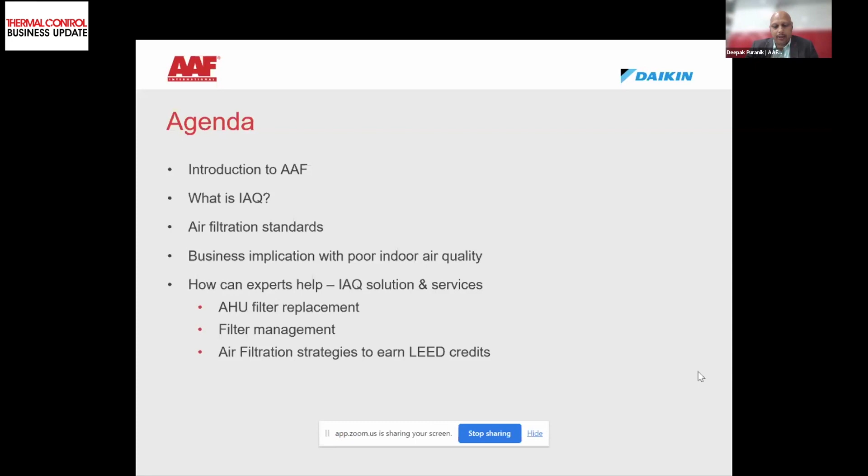The agenda of this quick talk of 10 minutes is to understand what is indoor air quality, what are the air filtration standards, what are the possible business implications of poor indoor air quality, what are the challenges, and then how an expert can help in attaining good indoor air quality in any commercial space.

So let's understand what is indoor air quality. Generally, indoor air quality is viewed and perceived differently by different individuals based on what they see, what they smell, what they feel. But it's important to have the technical view towards indoor air quality.

Indoor air quality refers to the air quality within the building, contributed by parameters like the level of pollutants present in that indoor air. It's often seen that if indoor space is not maintained the way it needs to be, then indoor spaces are 5 times more polluted than outdoor spaces.

What are those possible indoor air pollutants? They could be particulate matters, dust, ash, molds, pollen, bacteria, virus, etc. Then there's another type of pollutants: gaseous pollutants, which include volatile organic compounds, ozone, hydrogen sulfide, NOx, SOx, ammonia, such pollutants.

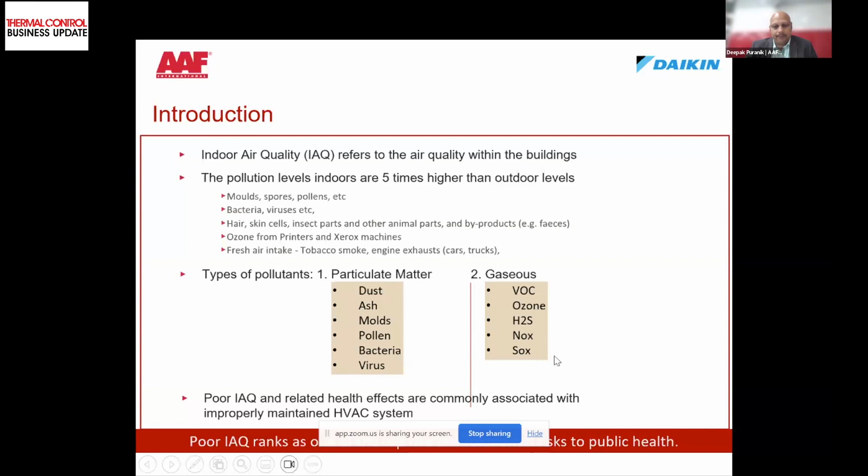Having understood what those pollutants are and what indoor air quality is, to define indoor air quality, standard organizations like WHO, OSHA, and a few more have defined what should be the threshold levels of those parameters we consider as pollutants. These are a few examples of the parameters that are measured and monitored to maintain good indoor air quality within occupied spaces.

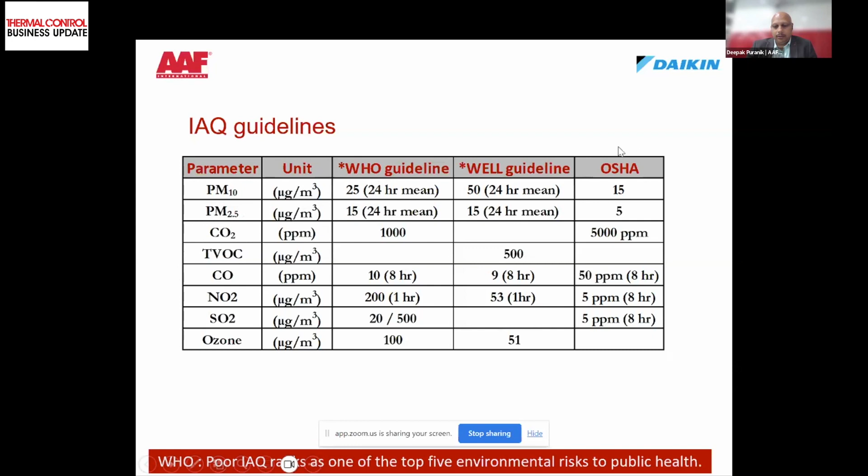The numbers and units that you see are the threshold levels guided by the respective standard organizations.

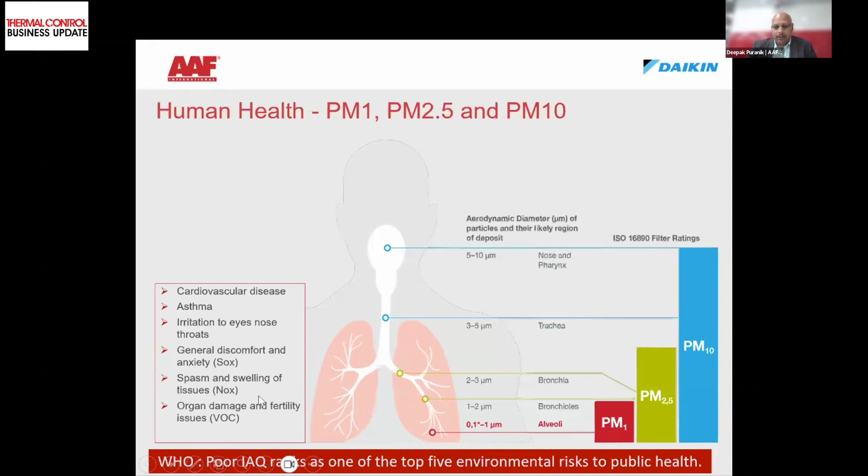Having understood what indoor air quality is, what different parameters contribute to it, and what should be the threshold levels, it's really important to note that this is often an ignored topic. One, because it's not visible. Second, because people often don't see the business implication of poor indoor air quality.

The reason I'm talking about business implications is because we all go to business establishments to work, and we spend most of our time in those indoor spaces. So it's very important to make business heads, CEOs, or business owners realize how important indoor air quality is, and what are the possible implications of poor indoor air quality.

Because of poor indoor air quality, many problems may arise in the occupants' area. It could be health issues, sick building syndrome, odor, energy consequences, equipment corrosion because of the corrosive environment, challenges of meeting environmental norms, and of course, you have neighbors to take care of. The implications of these problems could be many and on a large scale.

The immediate implication is poor employee experience, which results in low employee productivity, and that eventually results in financial losses. What is this value, what is this impact? It depends on building to building, business to business. It's important to make people realize how poor indoor air quality impacts their businesses, so that there is an inclination to invest in good indoor air quality.

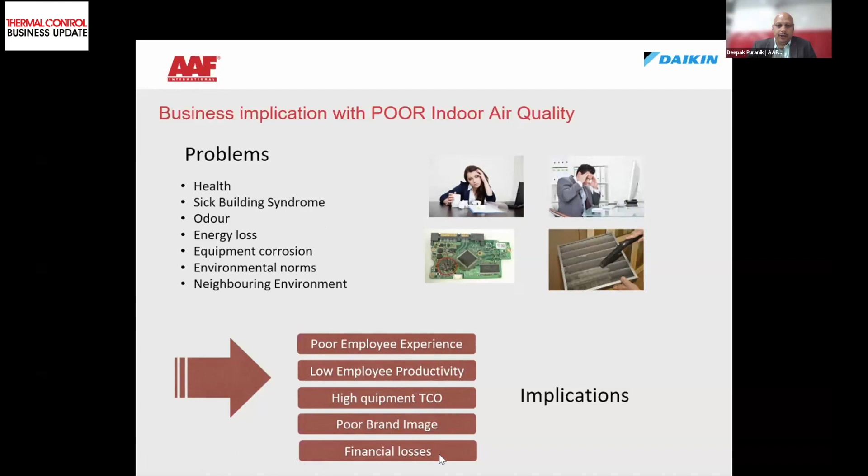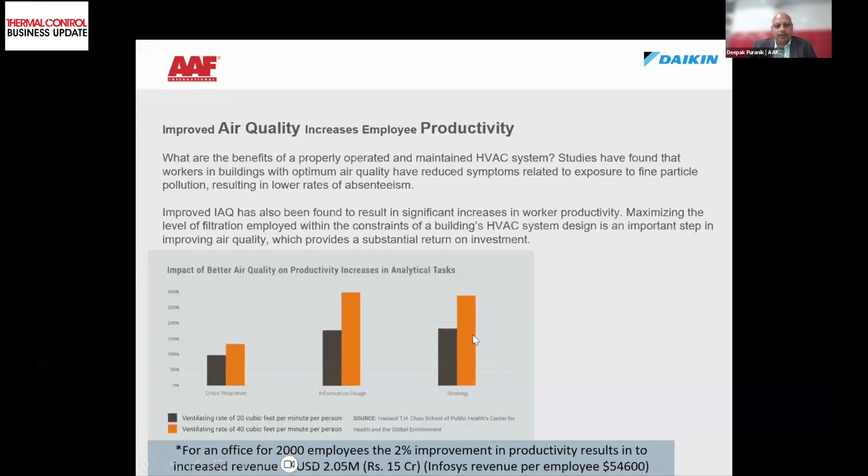Having understood what indoor air quality is and how it impacts business, what are the problems and implications, let's understand something basic: the technical side of indoor air quality, that is the air filtration standards.

There are three prevalent air filtration standards that exist. One is ASHRAE 52.2, the American standard. Then EN 779, the European standard. And then there's the ISO standard, ISO 16890.

The most recent standard introduced is ISO 16890, with the intention that ASHRAE 52.2 and EN 779 would be discontinued, but that hasn't happened in the practical world. People still talk about ASHRAE, EN, and also ISO 16890.

These standards have basically been derived based on the efficiency those filters exhibit when they are tested. I'll just take two examples of how these are categorized.

For example, if we look at a MERV 8 filter in ASHRAE 52.2, this filter exhibits 70% efficiency for dust particles of size 3 to 10 micron, and 20% efficiency for dust particles of size 1 to 3 micron.

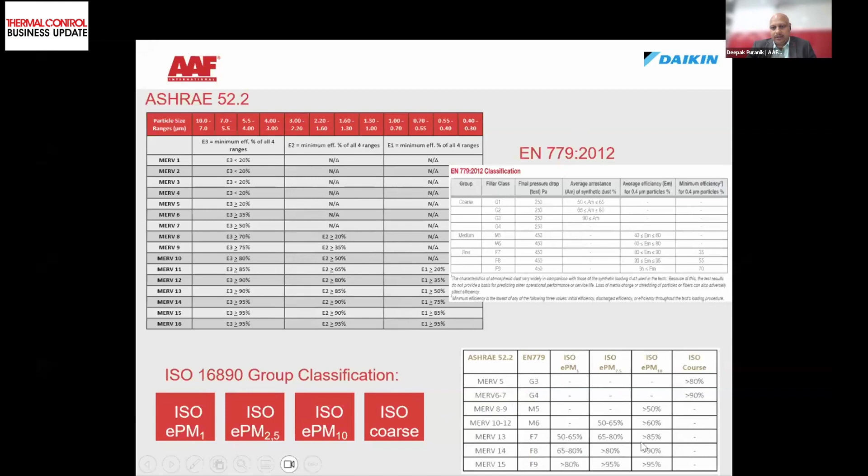I'll take two examples. MERV 8 is equivalent to G4 in EN 779, which is equivalent to 90% efficiency ISO coarse. And MERV 13 is equivalent to F7, which is equivalent to any of these three ISO standards.

In one of the previous discussions, I was talking about the scientific methodology to select the right filter, and this is the methodology. I will not go into detail, but I'll just touch on the surface.

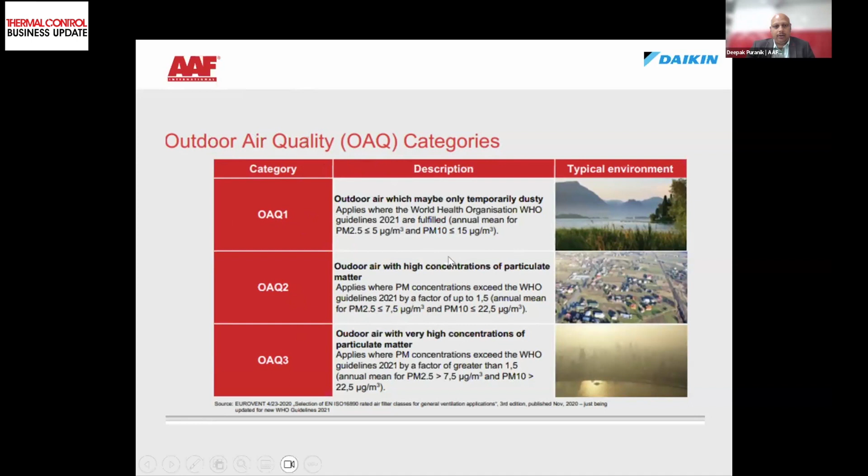When selecting the filter, it's important to understand the outdoor air quality. Outdoor air quality is categorized under OAQ 1, 2, and 3 based on the WHO standard. OAQ 1 is the cleanest environment, OAQ 2 is moderately polluted, and OAQ 3 is heavily polluted.

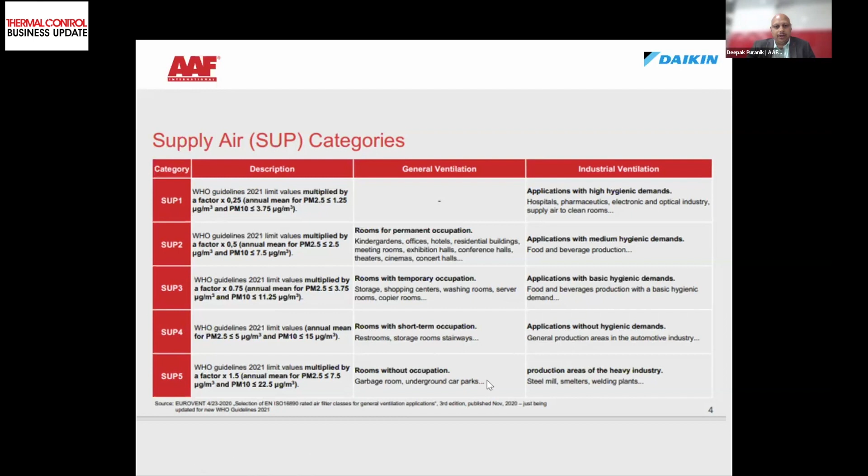Then it's important to see the supply air categories, classified under the range supply air 1, 2, 3, 4, and 5. 1 is the highest hygiene requirement for supply air, and 5 is the lowest. The supply air quality and outdoor air quality are mapped in a matrix.

For example, if you are coming up with a shopping mall in city center Delhi, how do you select the filter? We know city center in Delhi is classified under OAQ 3, and shopping malls are classified under SUP 3. So we would look at this matrix and map OAQ 3 and SUP 3.

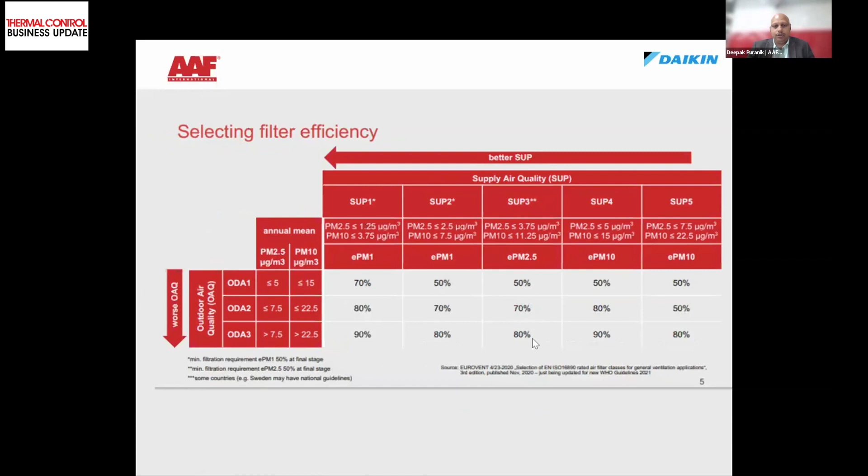So we arrive at an 80% EPM 2.5 filter. This should be the final stage filter, and to protect this filter, there have to be pre and fine filters that need to be worked upon. This is the simple and basic methodology to select the right filter for the building.

Having selected the performance efficient filter, it's also important to look at the energy that is consumed by the filter. So for all designers and those looking at replacing or upgrading filters in their building, it's important to know what kind of energy filters consume.

How does this reflect into the money that you spend? Typically, a 1 lakh square feet building would consume around 29 to 30 lakhs when it comes to filtration.

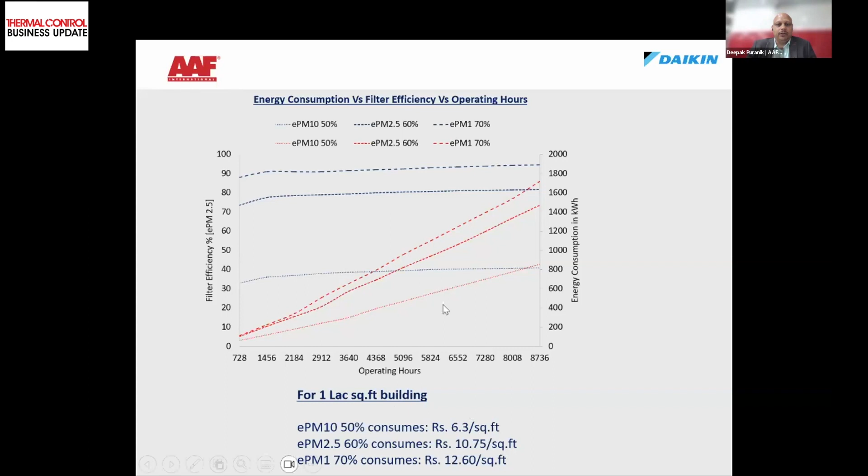So it's very important whether the right selection of filter could increase this number from 30 lakhs to 40 lakhs, or reduce it from 30 lakhs to 25 or 20 lakhs. Selection of filter, keeping energy consumption in mind, is very important.

This is one option for how you balance between the efficiency of the filters and energy consumption of the filter. I'll just read the inference of this research and study that has been done.

It says with 14% higher expenses in operation cost and capital cost of the filter, you will be protecting people from 82% of the potent contagious particles every day. This is a very important aspect for designers to consider.

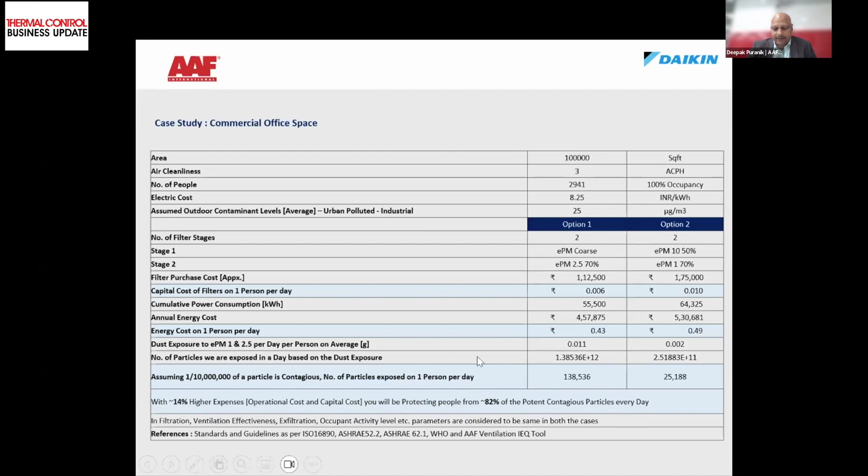These are the few flagship products used in the market, the AAF products. This is typically viewed as a pre-filter, G4 grade, equivalent to MERV rating equivalent to 60%.

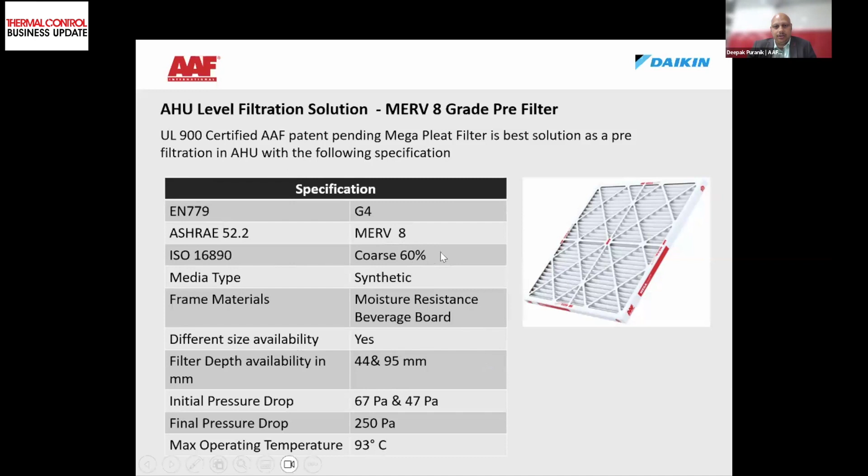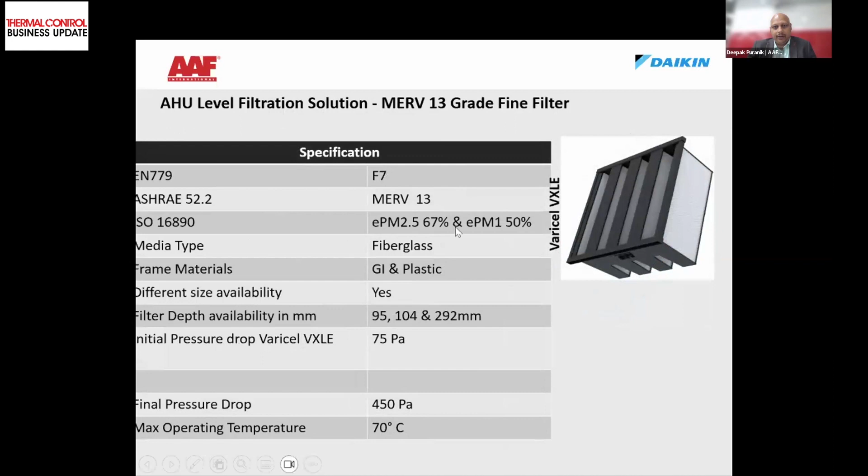This is the V-Bank filter. F7 grade, MERV 13, ePM2.5 67% and ePM1 50% filter. F9, MERV 15, equivalent to ePM1 85% filter.

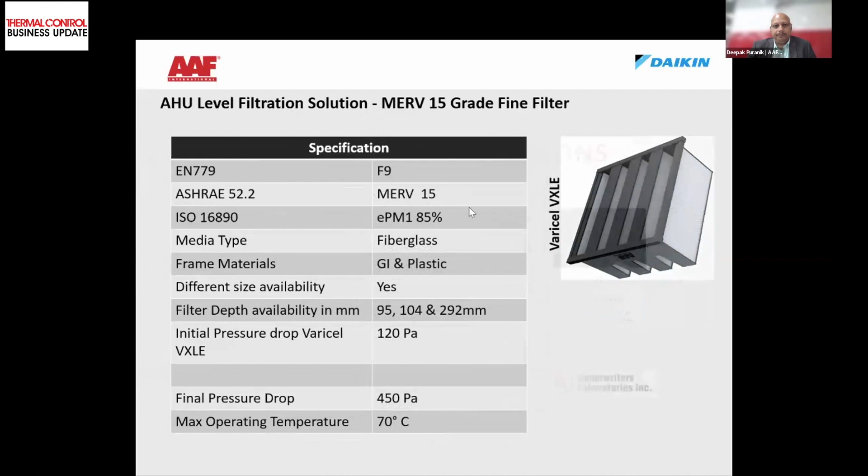Earlier in this presentation, we spoke about the gaseous contaminants. The mechanical filters do not filter the gaseous contaminants.

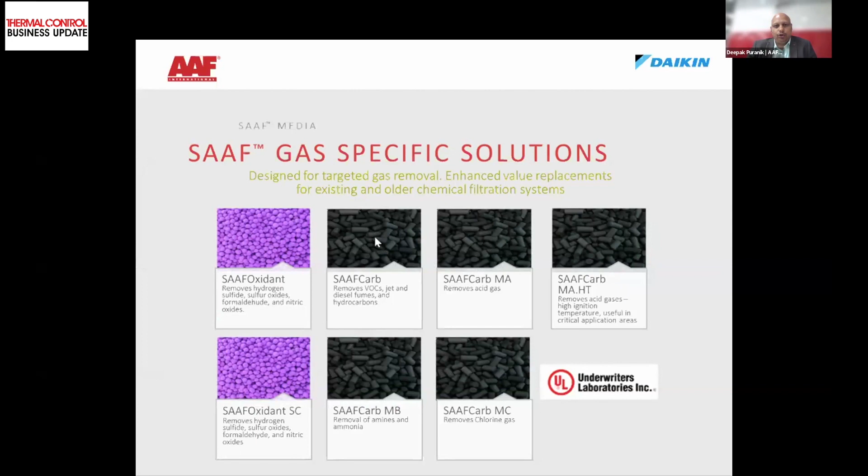So to remove the gaseous contaminants, there's something called gas phase filters, often known as activated carbon and activated alumina. Based on the contamination, these come in the form of granules, chemically coated based on the kind of gaseous contaminants that need to be removed, and used in the various equipment seen on the slide based on the concentration that needs to be removed. The type of equipment will be used accordingly.

So, knowing what kind of pollution, what threshold needs to be maintained, what guidelines need to be followed - how can indoor air quality experts help? That's something interesting to look at.

This also connects to the best practices question that Mr. Gopal Krishna asked earlier in this session. The best practices can start with having awareness programs for organizations and individuals, and then there can be site surveys and reports which include the benchmark and other analysis connecting to energy and total cost of ownership, etc. And then comes the solution.

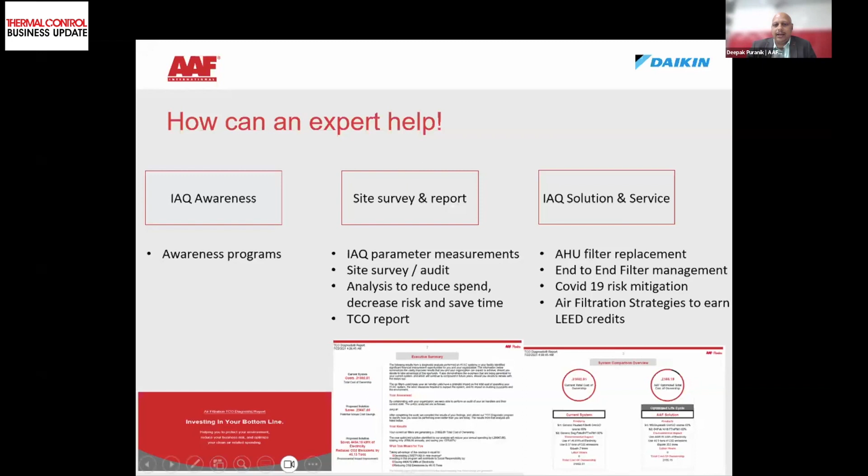Then what kind of solution can be had to serve the purpose and the reason why you want to go for indoor air quality. It can be for health reasons, for process, or for environment reasons.

This is one of the new trends people are looking for - IAQ service, which includes the end-to-end management of indoor air quality, where the expert would completely manage the indoor air quality, bring clarity into it, make the invisible visible. There would be 24/7 indoor air quality monitoring facility provided, and there will be commitment to indoor air quality. So it's more of a performance-based contract for indoor air quality.

With this, it would be a kind of OPEX-based model charged per square feet per month, and the days and months when the committed parameters of indoor air quality are not managed, that day and month will not be charged. Very interesting model to explore.

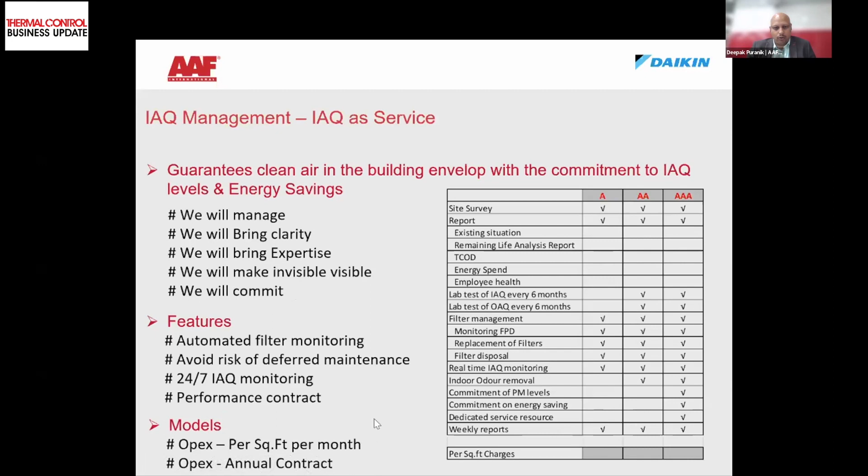This is the technology to monitor indoor air quality. There will be sensors - indoor air quality sensor, outdoor air quality sensors, DP sensors - connected to the gateway and to the cloud, and then from the cloud you can download an app where you'd see various parameters that help you have insights of indoor air quality, energy usage by the filters, remaining life span of the filters, and the TCO of the equipment invested for achieving indoor air quality.

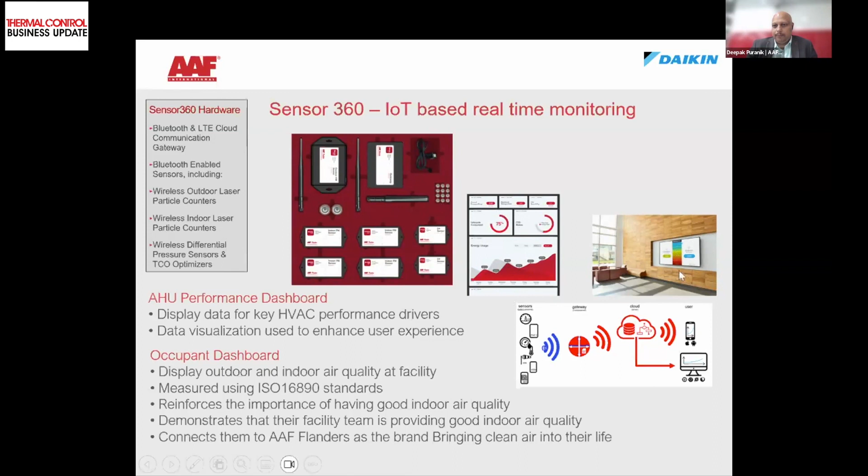All this can be viewed, and you can also display the indoor air quality parameters and outdoor air quality parameters on the smart TV. So such provisions are also available.

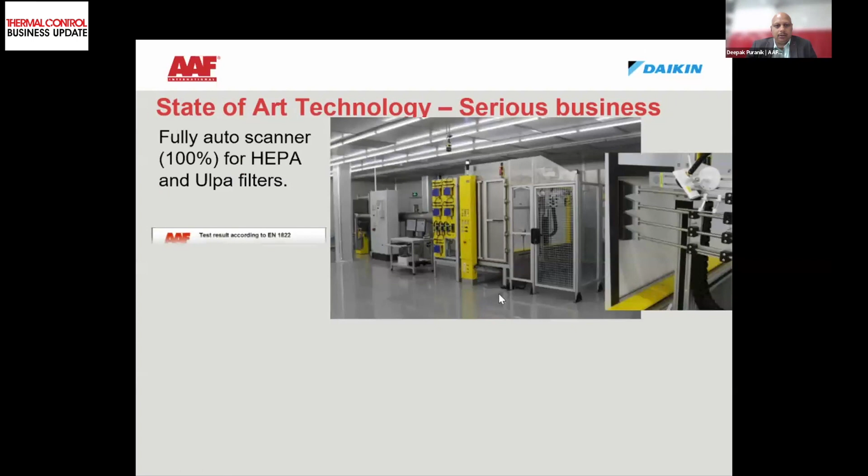Speaking about air quality, filtration plays a major role, and the type of filters and standards used become much more important. So it's all about the integrity the solution provider follows and the product manufacturer follows.

There is technology available. Companies have invested - AAF has invested in those technologies to test the filters. This is called an auto scanner, where you test the filters without any manual intervention as per EN 1822 standard. AAF is the only company that currently has this facility available in India. For ISO 16890, AAF has this facility, but in the Malaysia facility.

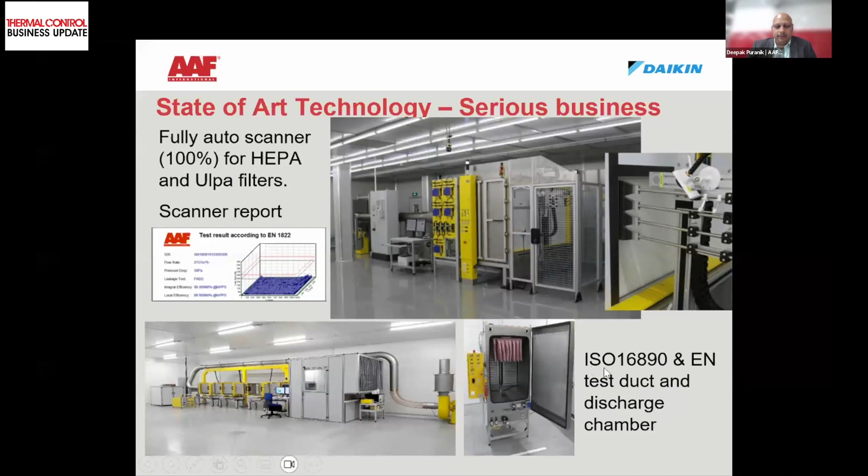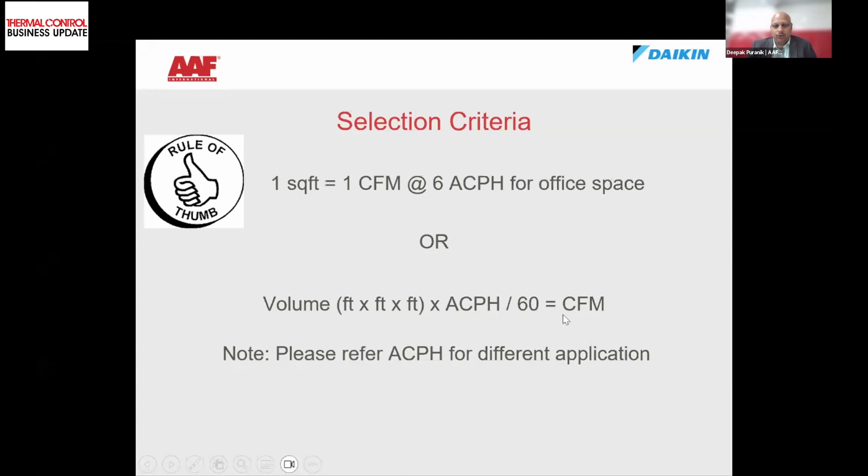AAF offers a wide range of equipment to support the indoor air quality goals of various types of buildings and businesses - starting from basic particulate matter filters to chemical media. We have ceiling suspended units, floor mounted units, recirculation units, and cassette type air separation units. So various solutions that we can bring on.